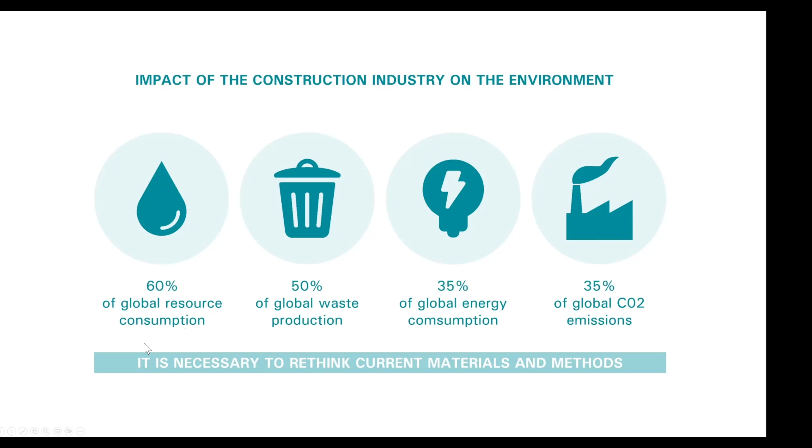This is the design philosophy I call materials as a design tool, conceptualized around three major factors: design, fabrication, and materials, where we start from a material or resource in a so-called bottom-up approach. We see what kind of materials are available, understand their properties, what fabrication technologies are available, and work up to a building component and then the whole building. That was the main context behind the proposal of BioMat as a unit or department, first at the University of Stuttgart, then Copenhagen, and later the company.

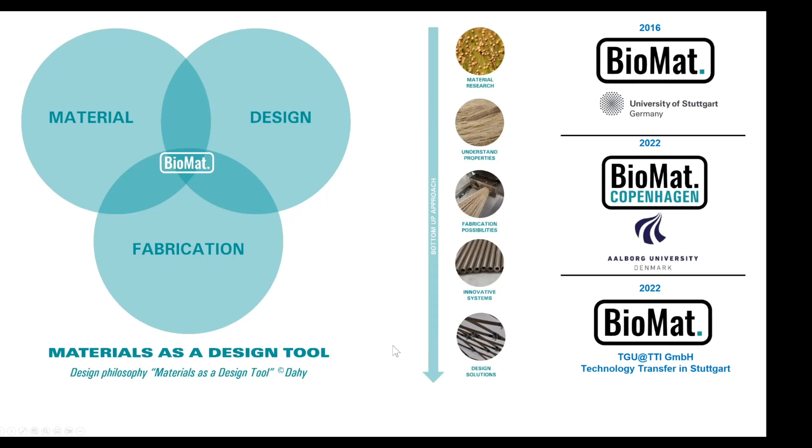But if we look deeper at how innovation happens in that context, it began because I personally started approaching colleagues from the automotive and aircraft industries, trying to make contact and understand more of the technologies they have in those fields, and imagining why we don't have such developments at the same speed in our industry.

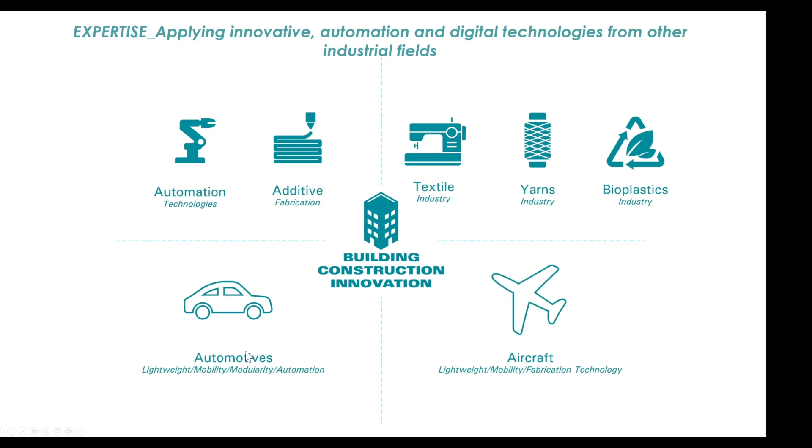Through knowledge gathered from those colleagues, and also from colleagues in textile manufacturing technologies and additive manufacturing and automation technologies generally, there was input into the context of building construction innovation.

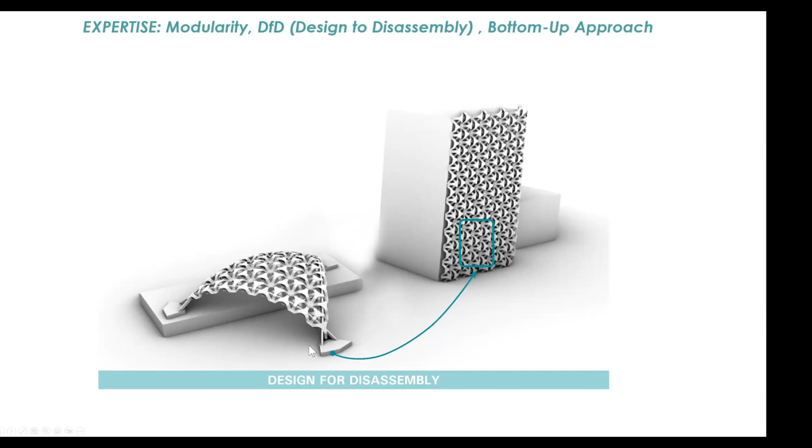Understanding the importance of integrating modularity, designing for disassembly, and caring about the whole circularity of building construction—that was one of the aims of integrating modularity, means of maintenance, and designing for disassembly in our building constructions. That was one of our major targets as well.

Industrial processes or fabrication processes have played a hero role in developing further solutions for our building industry—seeing how architects could understand extrusion, pultrusion, 3D printing, and all those technologies: tailoring, tailored fiber placement, thermoforming, and other additive manufacturing technologies and techniques.

How can this be rapidly prototyped in the area of offsite building construction, and how could this help initiate different topologies and elements in our field, and from it build different kinds of construction systems, including spatial structures.

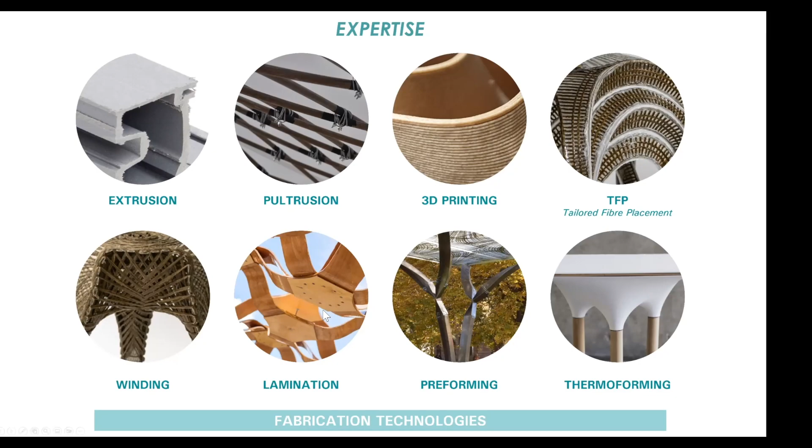One of the major things taken into account, especially during my PhD, I took as a kind of mission: to see different types of bio-based materials that are even annually renewable, specifically fibers and natural fibers, and see how far we can go in the building industry using those kinds of materials.

What you see here is a wide range of application possibilities we've developed in BioMat so far, different types of spatial structures and shell constructions, but also as part of a large industrial research project named SCB, Smart Circular Bridge. That was among all the projects between 2018 and today.

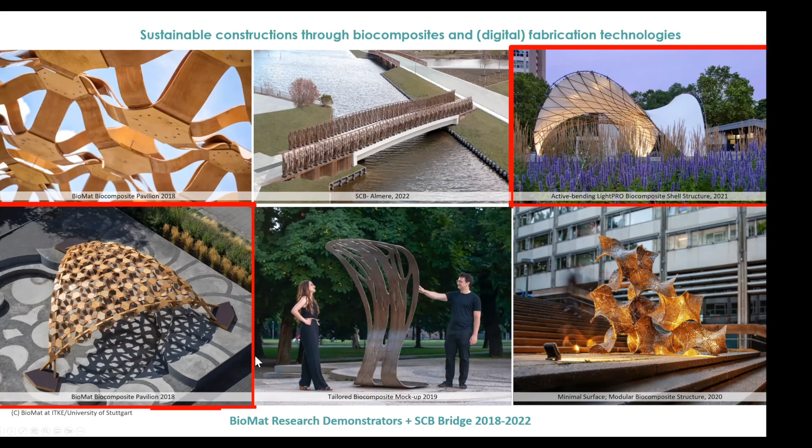In this presentation specifically, I would like to focus on two spatial structures: one in the area of extrusion, and another in the area of pultrusion, two different types of fabrication technologies, just to showcase how this occurred in our work.

But let me give you a flashback on what actually got me into this field at all. These are four different photos from four different continents showing the open burning of straw fibers, the agricultural residues coming out of the agricultural sector. Farmers openly burn this in open space to free the land from straw after cereal harvesting and cereal production.

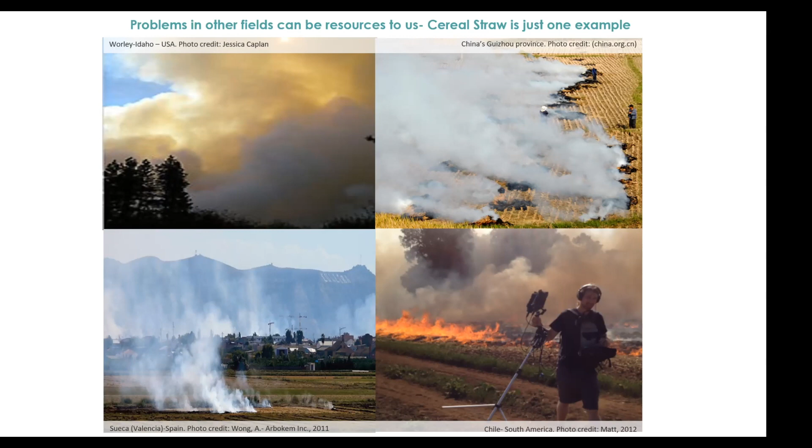As you know, there is some kind of food staple present all over the world, whether it's rice, wheat, and so on. The rest of this industry leaves straw behind, and in many parts of the world, unfortunately and unofficially, this resource is being burned, despite having the same inner composition as timber or wood—which, for us in building construction, means a lot. It could replace timber in many areas, and that was the main target and scope.

As an architect, I went into another part of this idea, taking this resource into a different level of producing fiberboards out of it, in collaboration with other disciplines like colleagues from the plastic manufacturing industry, understanding how this could lead to different designs and applications. The result was a development that was patented worldwide.

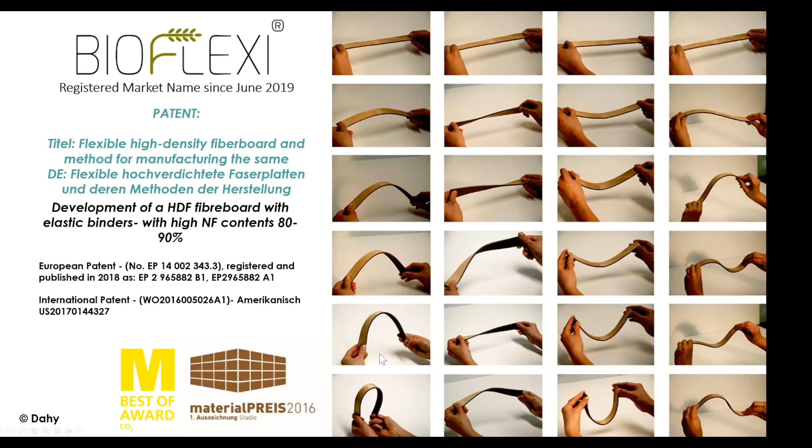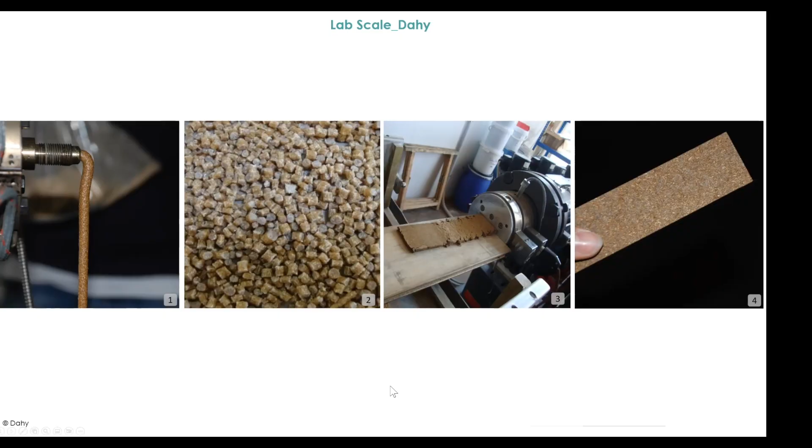It had a market name, BioFlexi. That's the lab scale extrusion process done within the plastic manufacturing industry. The outcome was given further into other applications, first on a small scale like different furniture designs, then covering a wide variation of indoor applications, investigating different fabrication systems for how this could be applied.

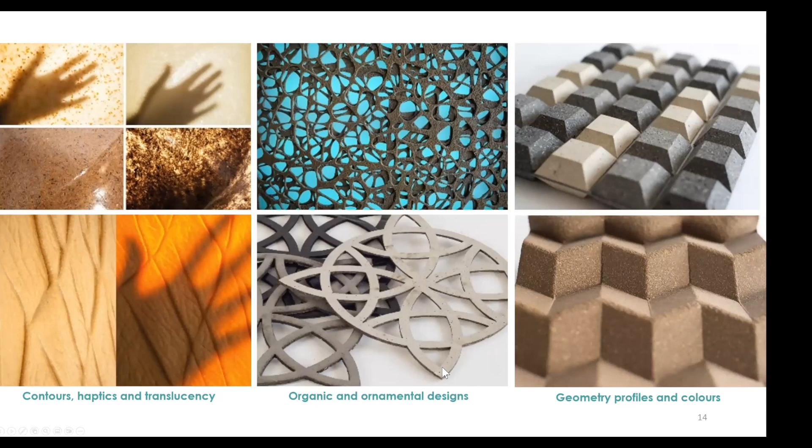Then another level was taken: how the same material could be integrated in a different approach to create a full construction system, investigated in the BioMat Pavilion of 2021. At that time, we had two different variations of biocomposite materials.

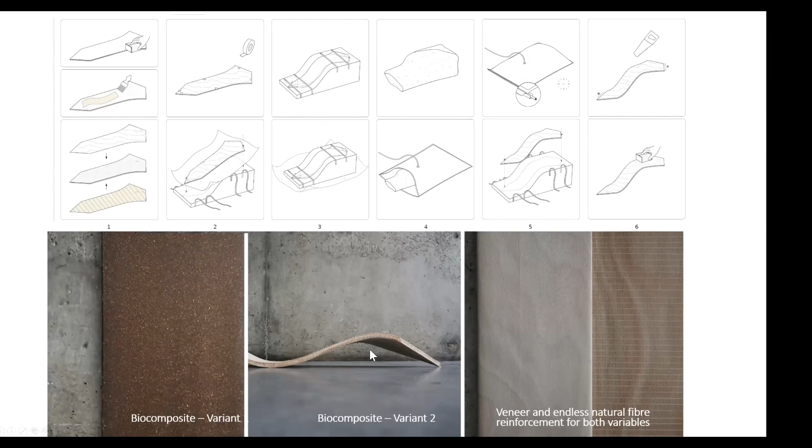One of the key developments was that we integrated a surface on both sides of the fiberboard, having reinforcement directions and reinforcement media, and depending on the reinforcement direction, the integrated loading capacity was supported. The outcome was sandwich panels of different curvatures.

We were able to build around 370 pieces or components through only 4 molds, shown here in the back. They were all numbered in order to put them in exact positions. The result was a shell construction with a span of 10 meters and a height of 3.5 to 4 meters.

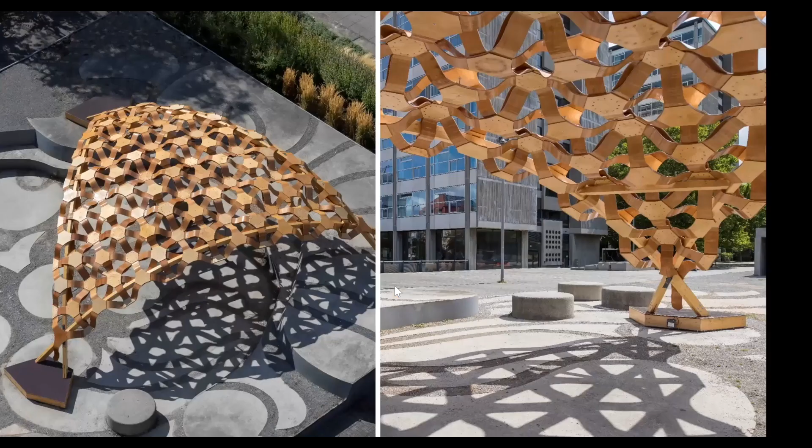But let me give a flashback in this storyline. This took place after the pre-development of BioFlexi, giving students the chance to look at the material itself and figure out how to make this approach doable—learning by doing on one side, and on the other side, using materials as a starting point in the design process.

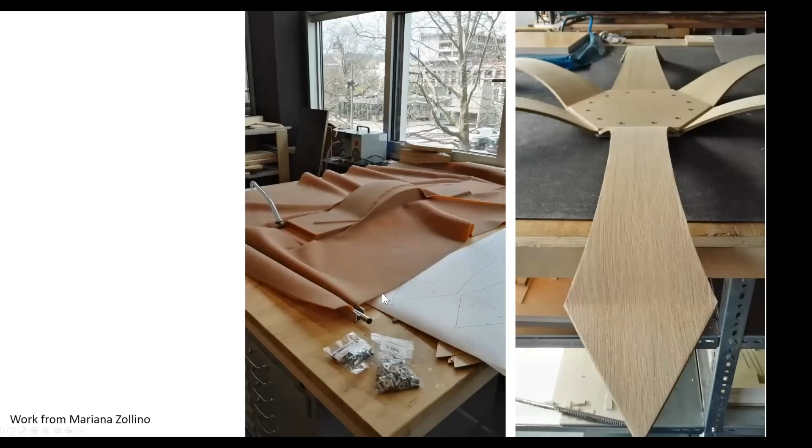Within the investigation, both practically, experimentally, and on the design level with parametric design, we were able to investigate all possible approaches—small scale, large scale—and how to make the upscaling process happen.

Here you see an investigation of the process of vacuuming the panels so we could make a closure with the veneer system. And here you can see we tried different possibilities of connections, because this is, at the end, a segmented shell construction, so the connection elements play a very big role.

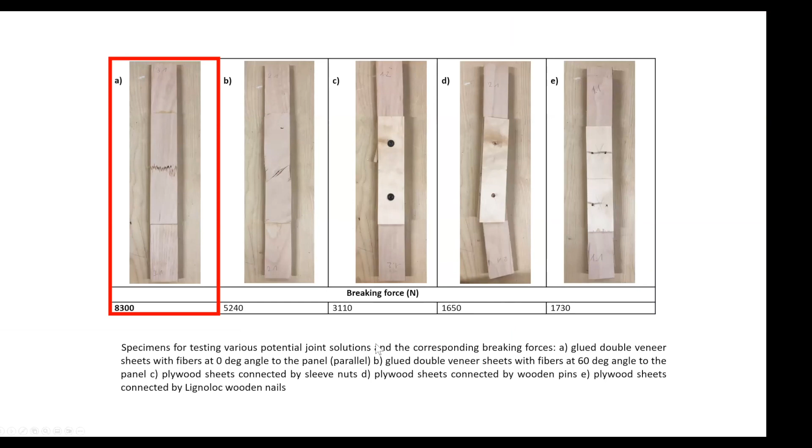After so many tests, we chose the correct variation for that system. Then we carried out the whole process at scale, from the building element level, to the pre-connection of the elements, to putting all the elements on site.

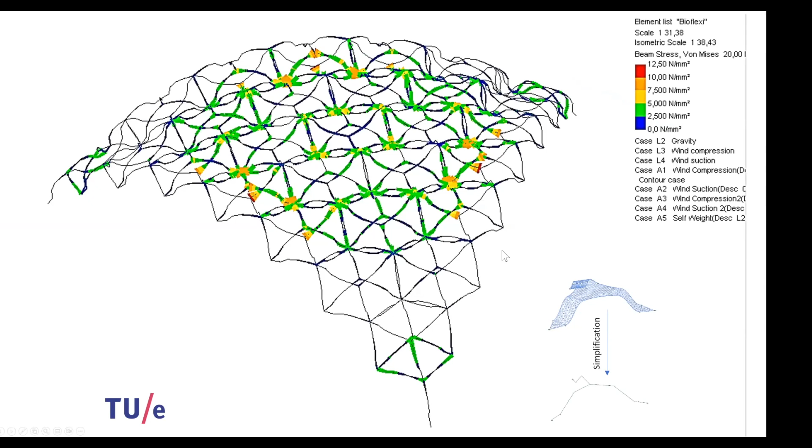This was not possible without the support of structural engineers, through international collaboration at that time with the Technical University of Eindhoven.

Accordingly, there was a construction hierarchy for how the whole shell was structured: in the form of a curved triangle on two different levels, with a distance between them equal to the difference in foundation heights—two up and one below, by 1.5 meters. We had to divide the very large triangle into 4, taking the edge pieces first, pre-connecting them on the ground, then putting them in the correct position.

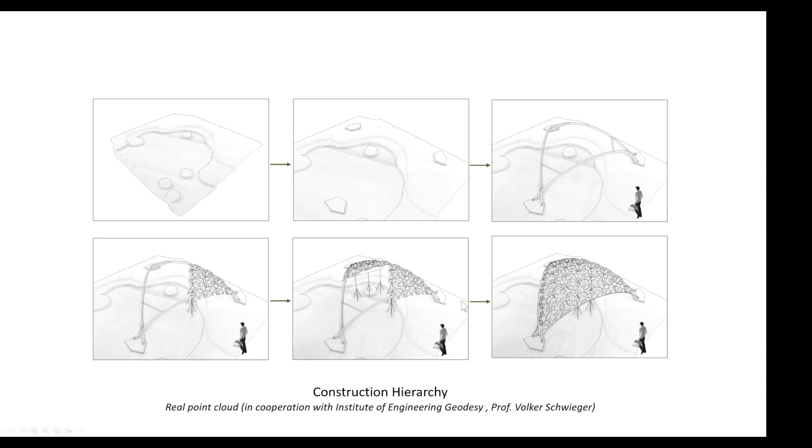To achieve a high level of accuracy, we had to cooperate further with colleagues who could provide 3D laser scanning of the whole building site, investigating in almost real time how accurate we were while placing the pieces, and also accurately positioning the anchor points or foundation points in the exact location.

We had different obstacles in this project, like a limitation that didn't allow any anchoring into the ground. We had to keep the load inside each of the 3 footings to no more than half a ton, 500 kilograms per square meter, because that was the maximum load allowance at that area, since there was an auditorium underneath the building site.

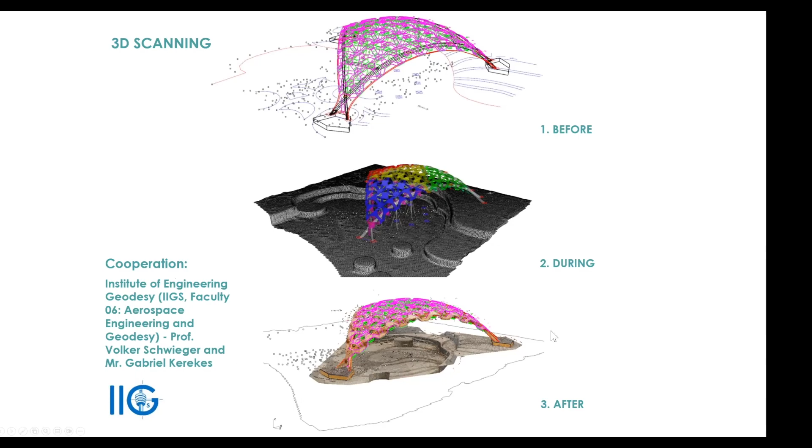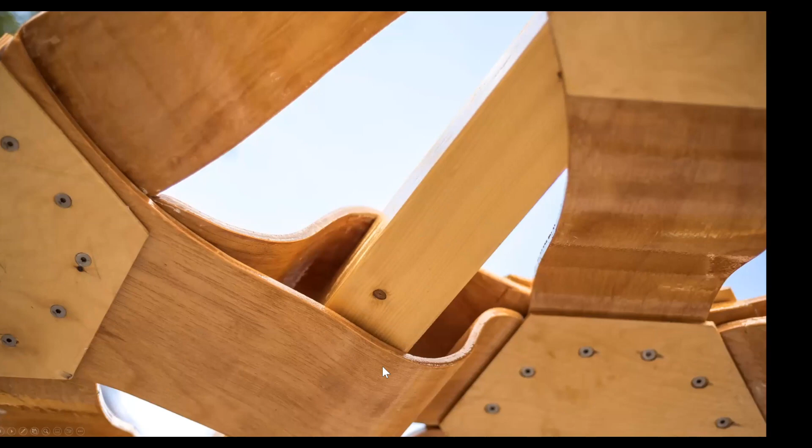This exact slide shows how important the integration of other disciplines is, like the geodesy colleagues of Professor Schwieger and his team, because it was essential to investigate how we construct using these alternative building systems with biocomposites. Then you see the outcome of that level of accuracy, and how much effort went into each single point through all of those collaborations and multidisciplinary integration.

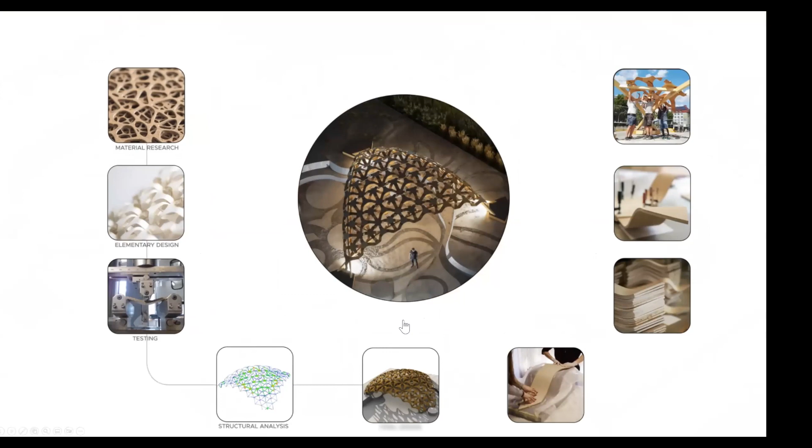Here, in this short video, you see the actual process of doing it. It was a bottom-up approach—we had to start from the building material itself, which was very freshly developed, and this was given further to students. They worked on different design variations, in a kind of competition.

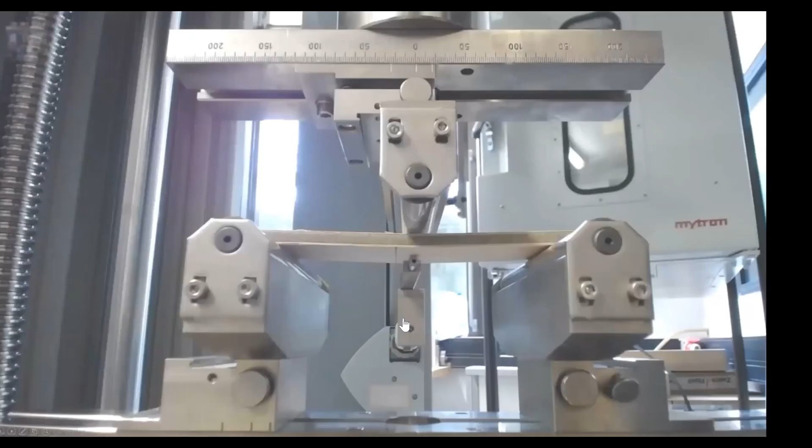Then one was chosen, and through cooperation with structural engineers, it was possible to see the highest deformation and create more than one unit of connection. Then through testing, it was possible to see how the veneering and veneer directions and reinforcement could create a level of structural performance to each single unit.

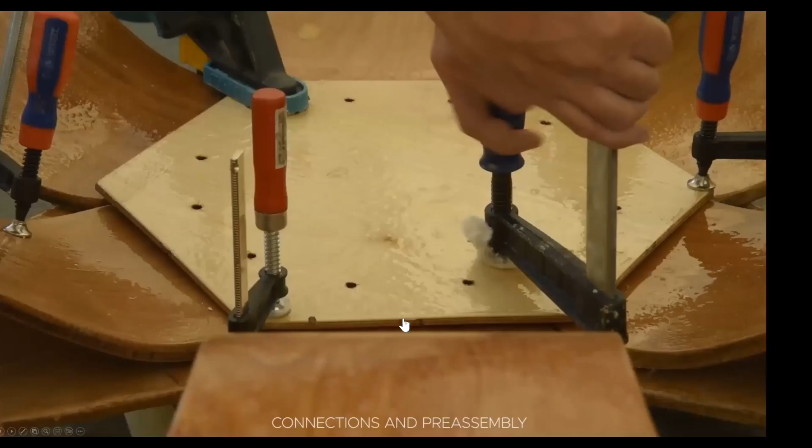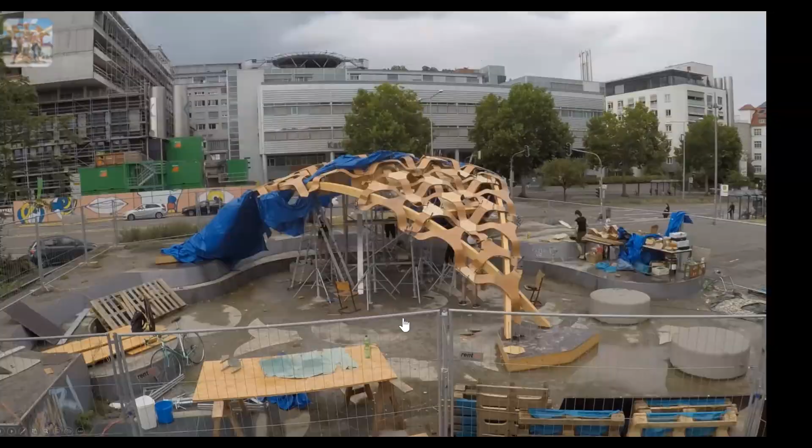We had in our studio, or turned it into a kind of smaller fabrication company, where we produced those 370 elements and then impregnated, connected, and coated the pieces. And then we had to have a kind of collection on site, and then we mounted each one of the triangles in place. So that's the overall short storyline of this pavilion.

The other one that I would love to share with you is the second one, done from another kind of fabrication system through pultrusion. The pultrusion was done using a totally different natural fiber, which is the flax fibers. And some of the pultruded profiles were also investigated from hemp fibers.

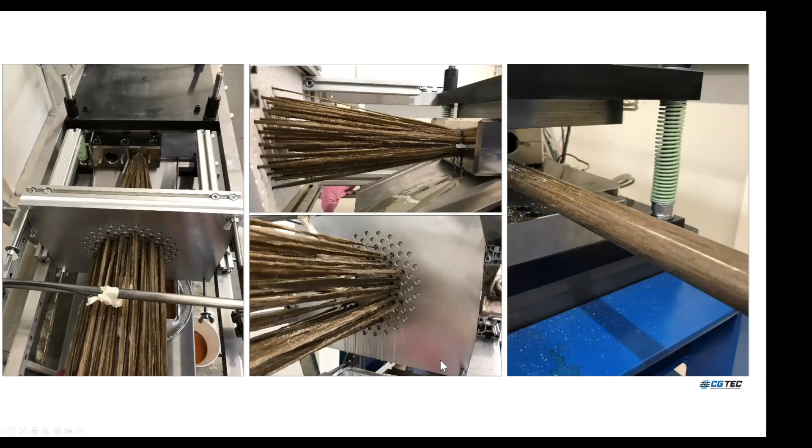Here is basically how pultrusion looks like. It's a fabrication system that works on aligning the fibers in a certain longitudinal direction, and the outcome is in the form of linear elements, like cylinders.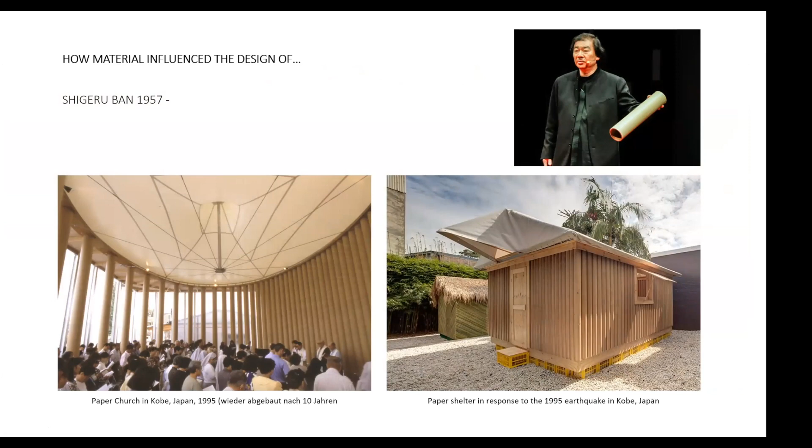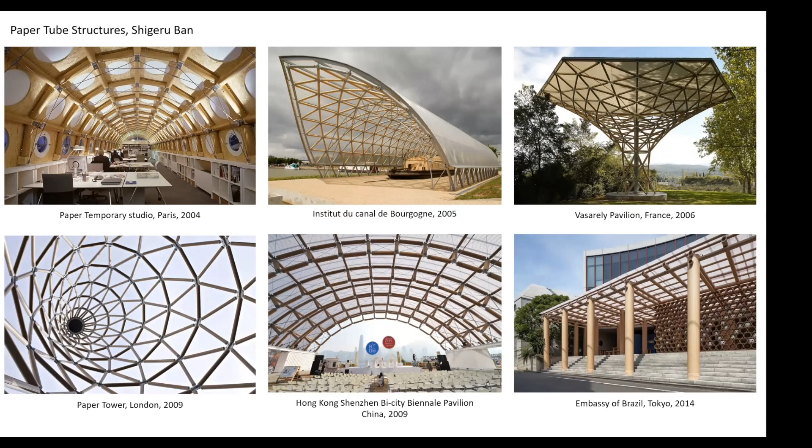This reminds us a bit of Shigeru Ban, for instance, and his paper tubes, which basically lie in almost the same geometrical form. He has investigated a lot in the area of spatial structure systems, and that had an effect on our thoughts and how we take this unit of pultruded natural fibers into another level of spatial structures.

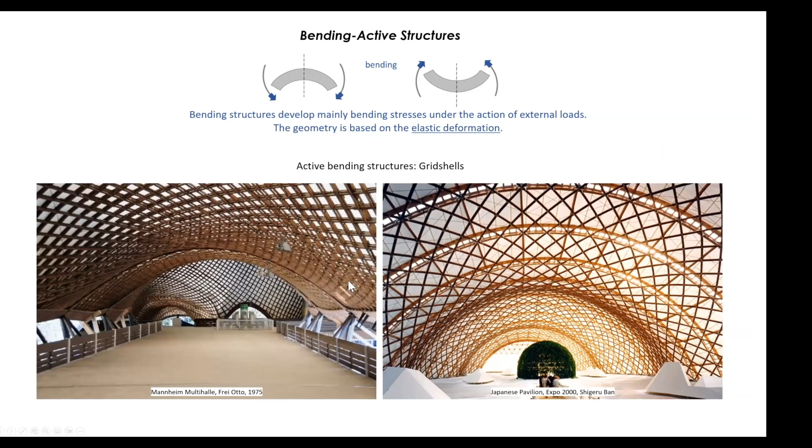Also, definitely applying systems like active bending structures, using the gridshells, and having these kinds of inputs from godfathers like Frei Otto or Shigeru Ban, having almost the same interior as you see with this integrated grid structure that has active bending in it. Those all influenced us, seeing the other colleague pioneers in that field.

So back again to the pultruded system, that is what we worked on in defining a certain hypothesis of this linear element and seeing its level of bending.

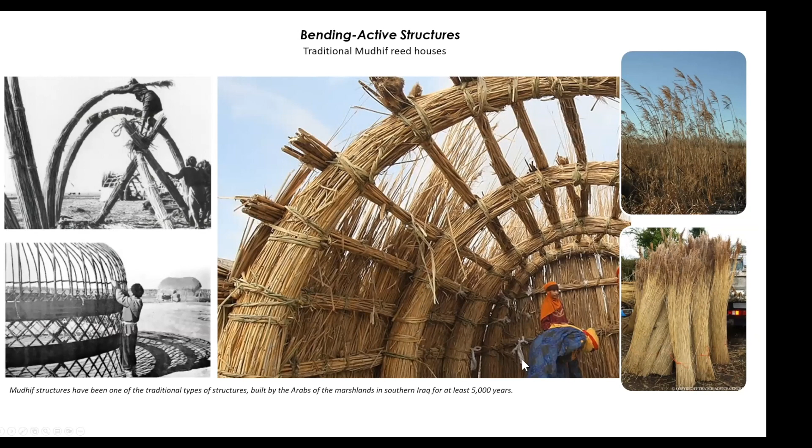This also reminded us of different kinds of local architectural systems, as you see in different parts of the world. This is from Iraq and other Asian and Arab regions, where basically different kinds of plants that had been growing there were used as a local element. So this is like reviving local architecture and vernacular systems back into our digital world using different fabrication technologies.

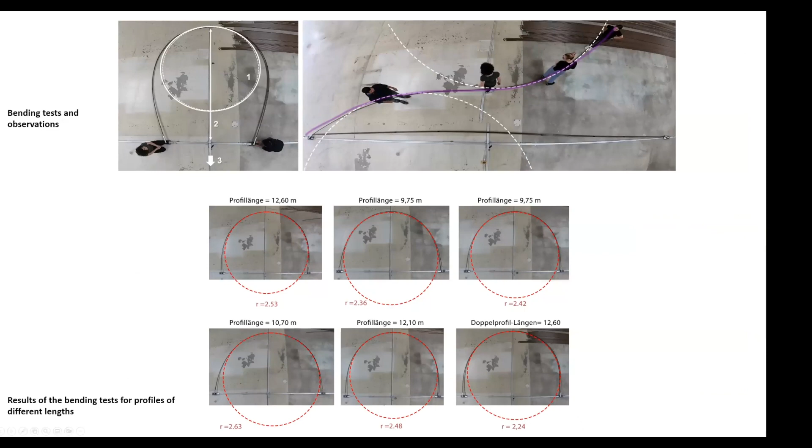Throughout that, there were so many studies understanding how far the curvature could go for the pultruded profiles, and investigations had been done through one of the PhD candidates.

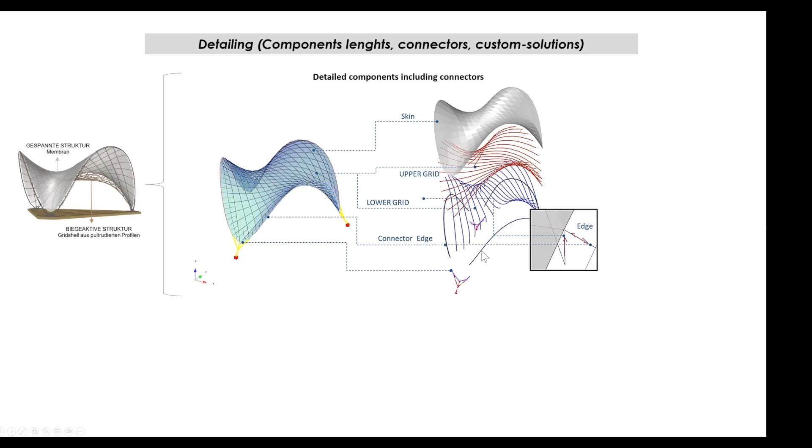The overall system was seen as having two grids, one upper, one lower, and there would be three boundaries like beams on three edges of the whole structure system. And then on top comes the skin, which is in the form of a membrane.

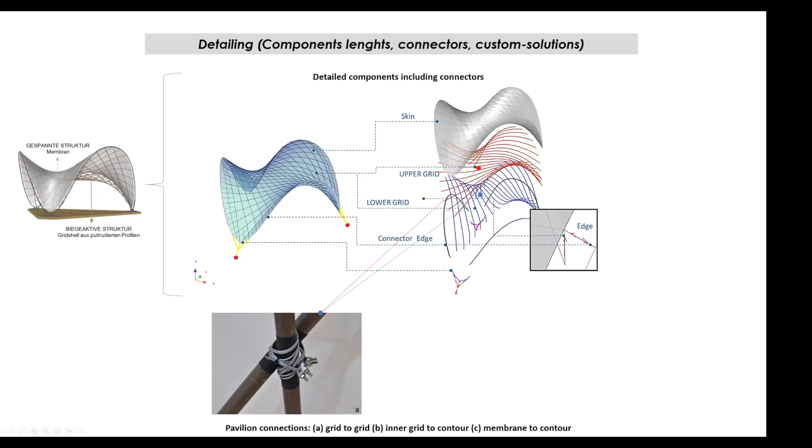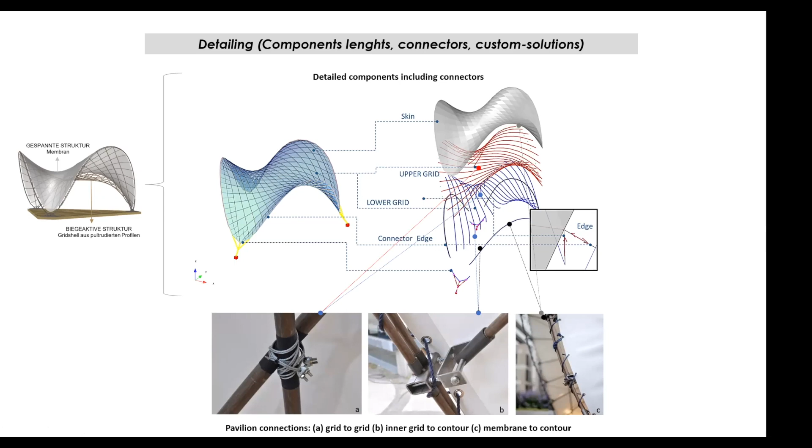So basically we had three connection types: one using lashing, a kind of connection well known for bamboo structure systems; then connections between the inner grid and the external contour, which was a double profile; and then a third connection system, a kind of rope, between the membrane and the external contour.

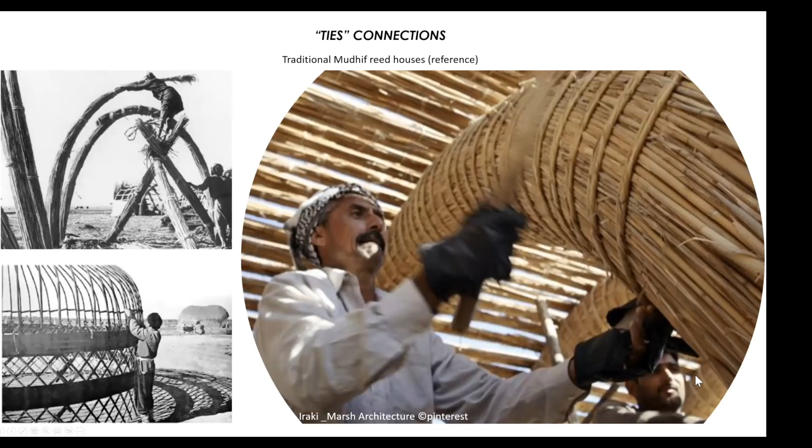In this project, so many investigations took place on what would be the best connection method and what would have a level of freedom, but at the same time provide the needed equilibrium. Of course, we had to look also at different kinds of local construction systems and how the connections and lashing systems have been taking place.

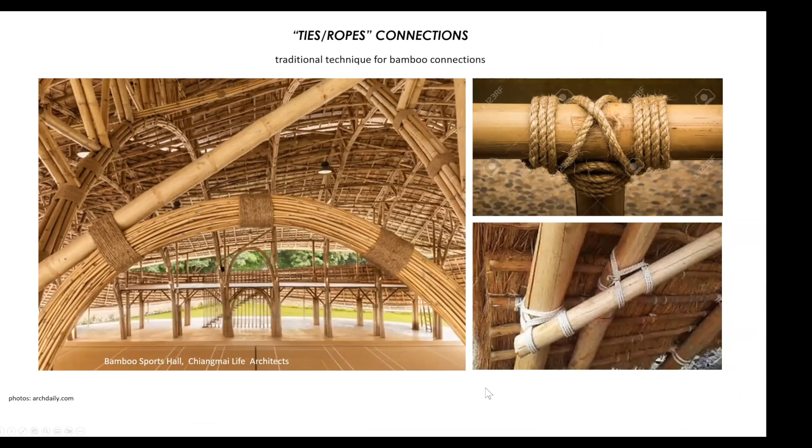The connection in the bamboo world was one of the things that influenced us, and also the previous work of Shigeru Ban in that field.

So this is back again to our pultruded profiles, and we had to go into, just like the other pavilion, a numbering system so that we would know the upper one, the lower network, and the connection points, and so on.

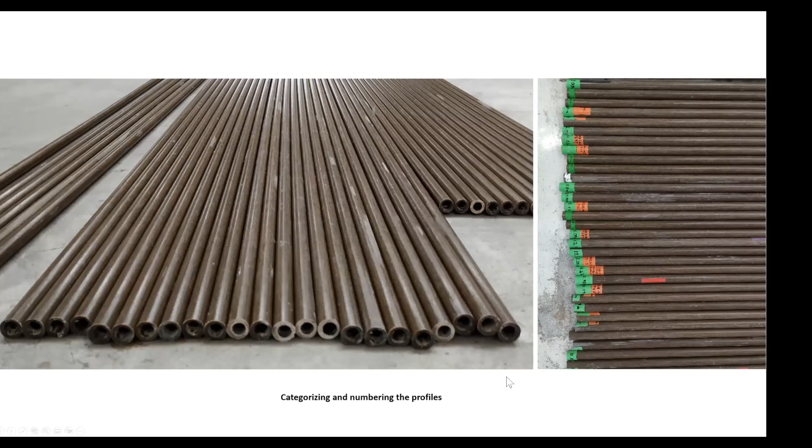And definitely also on site, we had again to have our contacts with the colleagues of geodesy to exactly provide the correct pointings of the footings, and locate the foundation points.

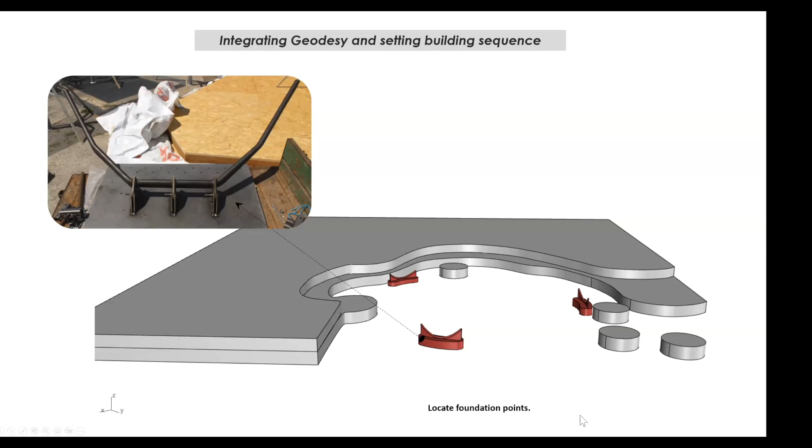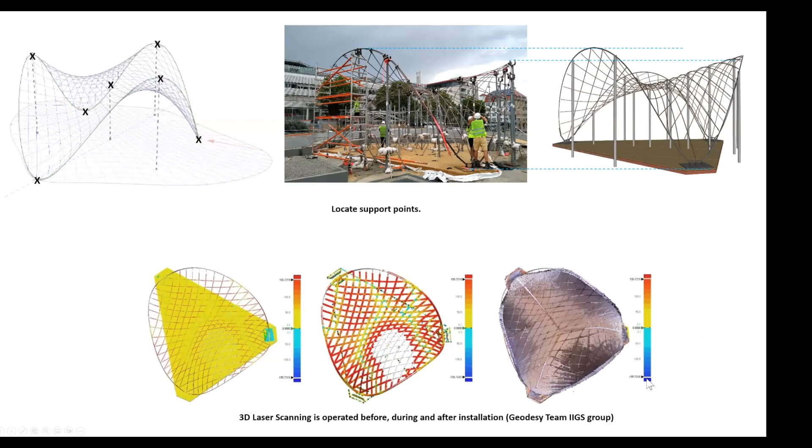It was essential that we minimize the number of temporary posts to locate the boundary lines first, and then to interconnect the longitudinal members till we reach the final state of equilibrium, as you see.

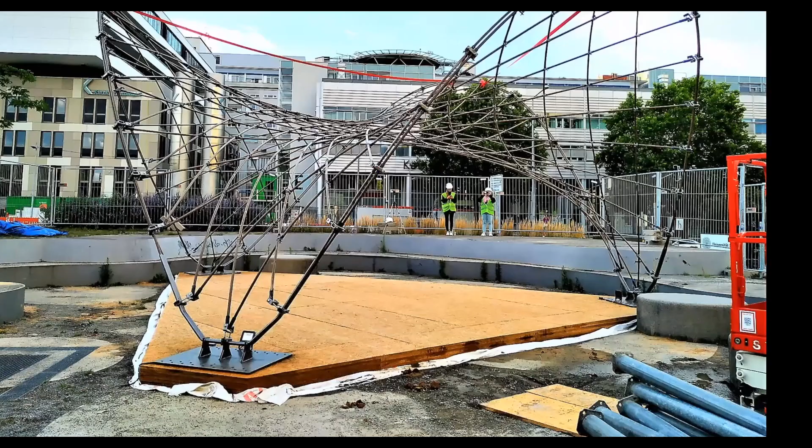This is how the connections looked like at the beginning here during the construction procedure, and then finally in its final format, covering it with the membrane.

So we had a nice chance to win many prizes, which is of course a big honor, but thanks to the bigger team, from different spectrums and sectors in the building industry, the textile manufacturing technologies, and colleagues from the structural area, from the Institute of ITKE, and the geodesy support and membrane support.

The very final thing I'd like to show, not necessarily in spatial structures, gives an input to what biocomposites can be applied in, which is even bridges or slabs. This gets us to a spectrum where biocomposites could be applied in multi-story buildings using slabs made of biocomposites, similar to the concept of these bridges.

This is one of 3 bridges that has been built. This one is already built, but the 2 others are still to come in a large project named Smart Circular Bridge, an Interreg EU project that should end next year. It's a connection and cooperation between 4 European countries, including Netherlands, Germany, Belgium, and France. We are generally 15 partners, and I present the architectural partner for the 3 bridges to be built in this project.

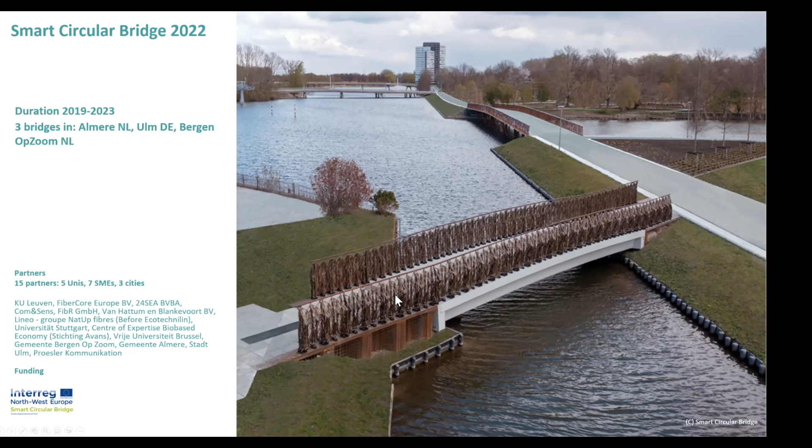The other partners represent 7 companies, 4 further universities, and 3 cities. The 3 cities are where these biocomposite smart circular bridges are to be built. As said, one is already built inside the garden show of Netherlands in Almere, the Floriade Expo. The coming ones are in Ulm and in Bergen op Zoom.

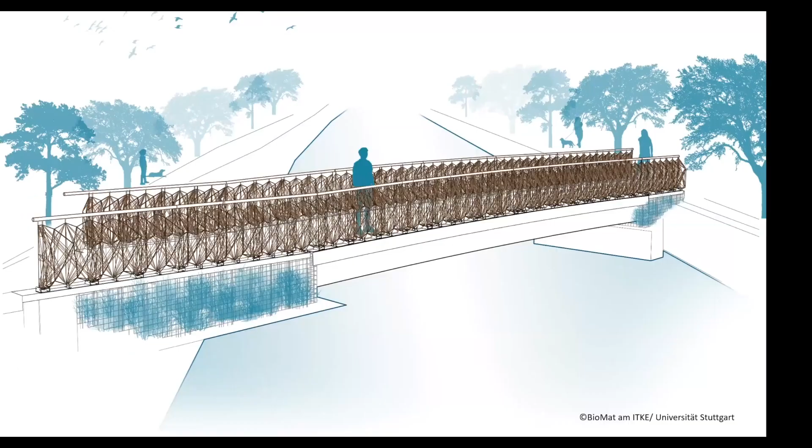This is our work, our preliminary design. Of course inputs were from structural engineers of the project and also from the fabricator of the balustrade of the bridge. Here you can see it in its final form. The span was 15 meters and the width was 3 meters.

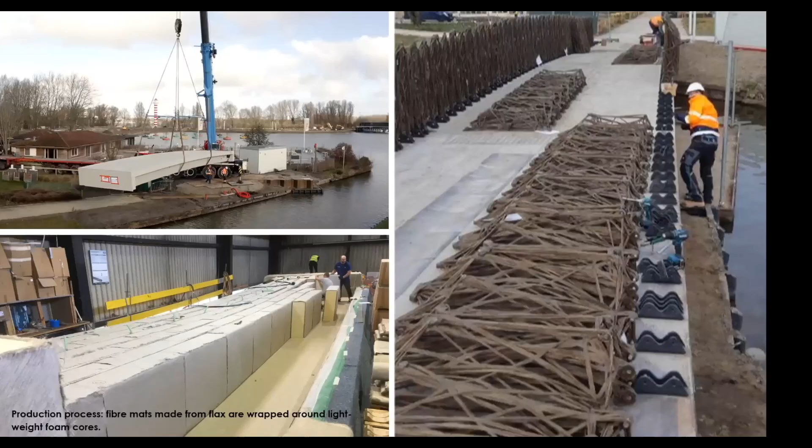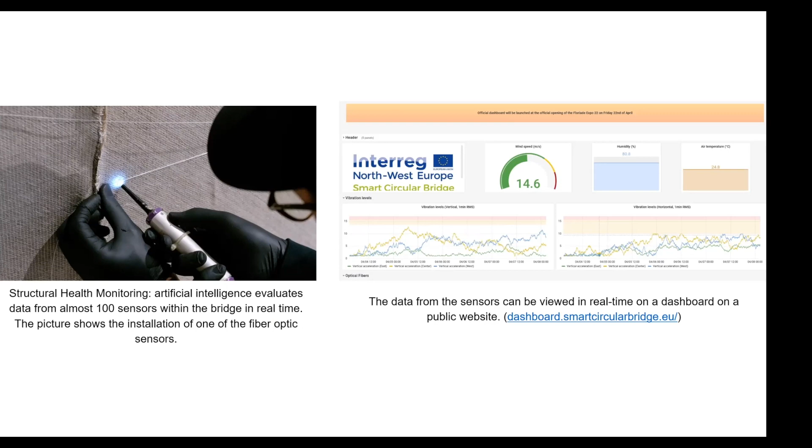And here during the installation. You see that the body of the bridge itself is just foam wrapped all around with flax fibers. The inside surface of the body of the bridge has integrated sensors for structural health monitoring, which one can see in real time on an online dashboard at dashboard.smartcircularbridge.eu.

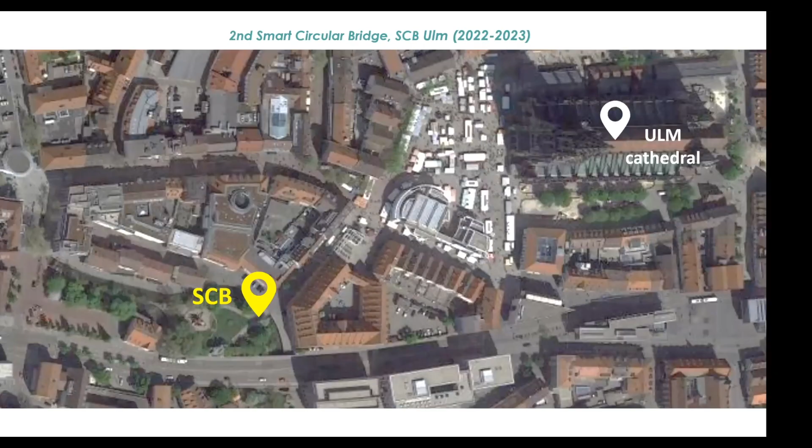I come through this to the end of the presentation. Thanks a lot for listening.

Hanna, thanks very much for taking us through your presentation, which covered a very interesting range of topics, everything from your BioFlexi materials to the work you've been doing with BioMat. Really fascinating topics, thank you for taking us through it. We usually conclude our interviews with an end section around sustainability, but that was very much the crux of your presentation. I wondered, you're obviously an excellent example of a bridge between someone who works with industry and someone who works in academia. With a view to sustainability, how do you think industry and academia can work together more effectively?

Well, that's our daily business, let's say. We're trying to combine knowledge with what is allowed to be built through norms and regulations applied in the correct form, showcasing that bio-based materials coming from annual renewable resources and plants could be turned into very strong elements, helping our building industry become more green and sustainable. It's well known that the spread of diseases like corona, the war, the increase in energy prices, and the earlier burning of forests in Australia and South America are all factors that increase prices and dramatically decrease resources. This is very obvious in the market and to industrial people, so they are keen to reach out to us and apply these approaches, because it's not only environmentally friendly, it's also very cost competitive with existing solutions.